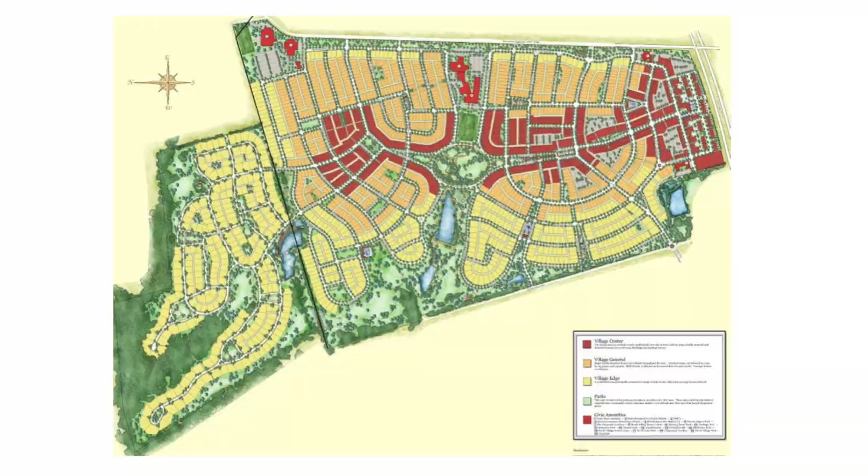And this is really an urbanistic type approach. This community is 600 acres, 2,800 dwelling units, 500,000 square foot in commercial, and 290,000 in total civic area. But the whole point of this whole project is to build a community within a community, to have a work-life balance. And so that's kind of how this all spawned from the original developers and their thinking and their philosophy.

So these homes are traditional style residential craftsman construction. It's kind of the first of its kind in this area of Louisville. You'll see houses that range anywhere from about 2,200 square foot all the way up to 5,000 square foot. You got a good mix of single-family residential houses in here. Again, it is a mixed-use community.

There is commercial space. This would be a big retail area that's in the middle of the town square. Restaurants, bars, clothing stores, just all different types of things. It has its own church. It has several schools in the area, and that's 600 acre property.

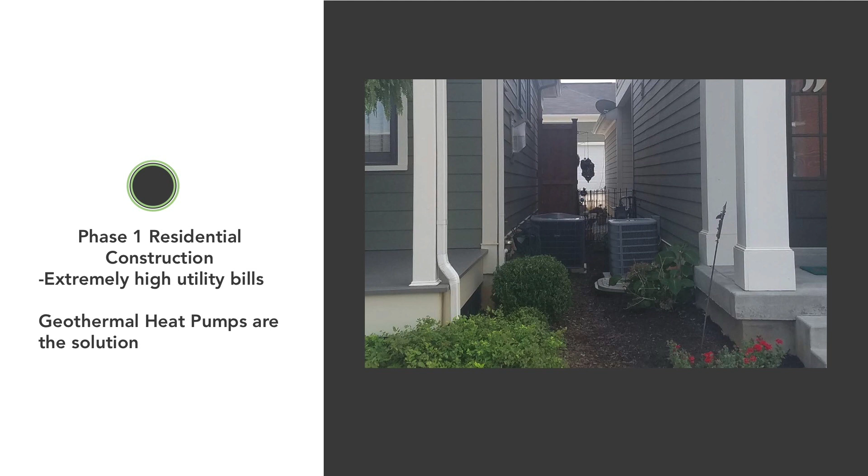So let's get into how this ended up being geothermal, because in the beginning it wasn't going to be a geothermal heat pump community. But what they found after they went into phase one, they started finding that what they were using was not working. And the reason why it wasn't working is because the setbacks on the houses were so tight. We're talking between 3 and 12 foot setbacks. And so as you can see in this photograph here, we have outdoor condenser units that are literally sitting right on top of each other.

So what was going on is that these units were failing prematurely. And the reason why is because they were literally cross-contaminating with hot air. They were trying to pull all this heat out of the houses, and the units were working against each other because they were literally stacked right on top of each other. So a couple things. They were failing prematurely, and when they didn't fail, they were very inefficient. They just weren't able to have any efficiency to them. They had no capacity, so therefore the houses were very uncomfortable. It just never worked right.

So when you had the inefficiency and then ultimately the premature failure, you had very unhappy homeowners. You know, they moved in with some expectation of a realistic electric bill. Well, they were getting astronomical electric bills, especially in Louisville, Kentucky, where if you've ever been there, it gets hot. So that was phase one construction. Close proximity, unit failure, noise.

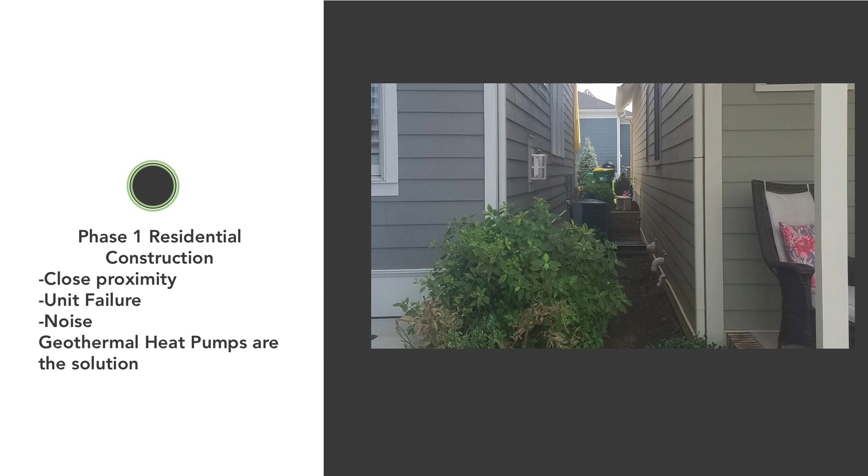Again, when you have these tight setbacks, you have small front porches, back porches. That was the other problem. All of these condenser units that were running outside, literally, it made a bunch of noise. So when these people are in this urbanistic type community, everything's real tight. When they're sitting outside, they were listening to these outdoor condensers. And so therefore that created another problem.

So what we did is I was giving a presentation at the National Association of Home Builders annual board meeting and trade show, a presentation on heat pump technology. And that's where I met one of the managing partners of Norton Commons, and he came to me and he said, man, I really need to look at this technology. He said, we have energy efficiency problems, all the problems that I just described. How can you help us with a solution with this technology?

And so next thing you know, I'm flying down there, we're going through it. A lot of people will always come to me and say, how did you get this all put together? It's like wedding planning. You literally have to plan this out. You have to vet the installing contractors. You have to educate the home builders that are actually in these projects. Typically, developers have a list of home builders that they'll bring in that they want to build in these type developments. So you have to go through and train, educate.

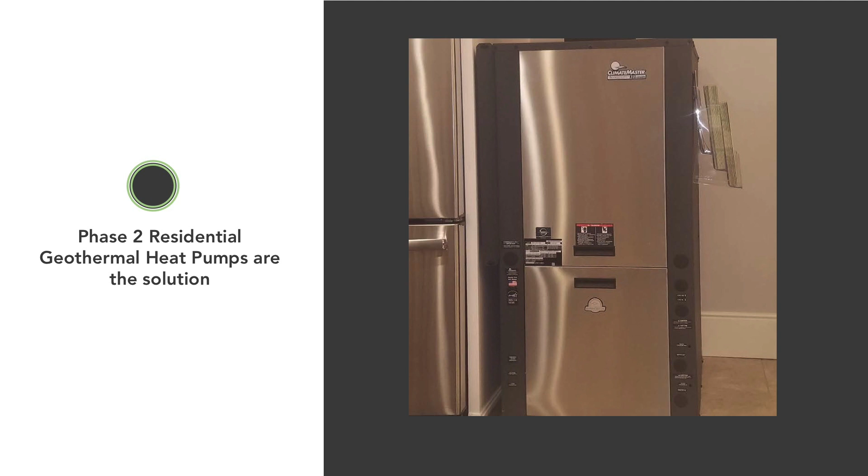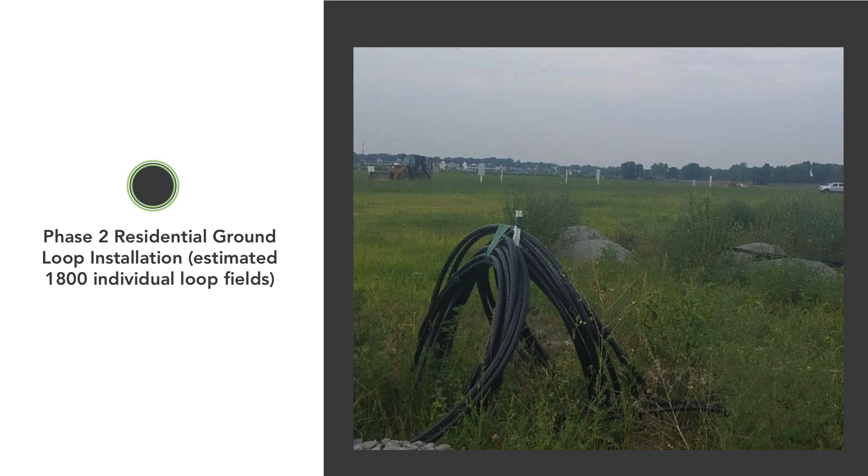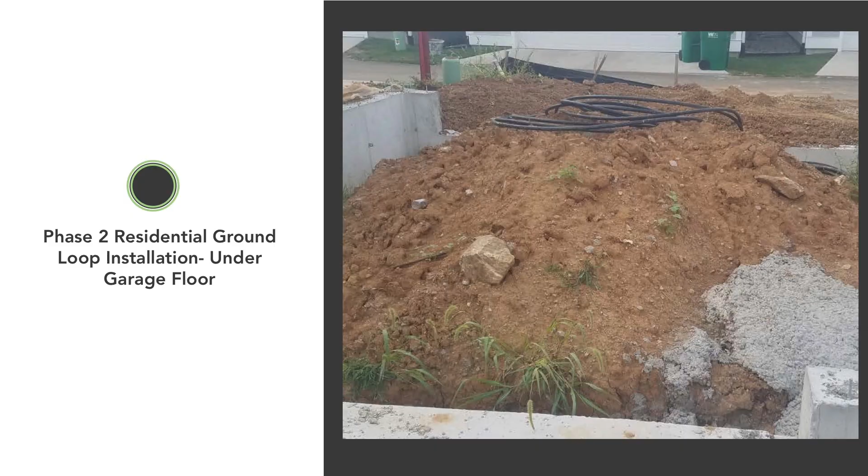So phase 2, we came in and we started drilling out for the different structures that were going up. They were pre-planned structures. We knew the load calculations on them, so we knew what the loop fields were going to need to be as far as the design. We did 300 foot per ton, the vertical closed loop system on this project. We would drill them, header everything together, and run the pipes up through the garage floor, or some of these homes had basements, so we would do a penetration through the basement. And then this would be the mechanical space.

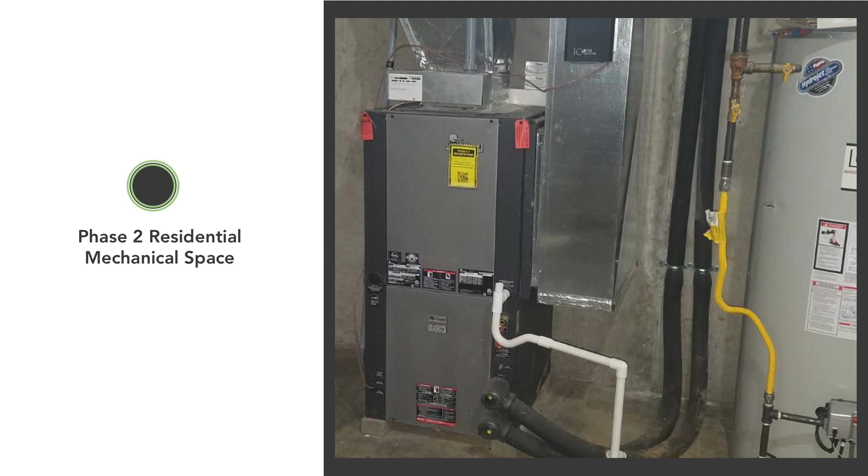And again, these homes are all electric. They did plumb gas into these homes, but it's not being used. It was a mandate by the gas company that they had to bring in their lines for them to get power, because the utility there has both the electric and the gas. So it's kind of a different animal from what we're dealing with down here in some markets. But it was a mandate.

So again, phase 2: no noise, 40 to 60% increase on HVAC heating and cooling efficiencies, hot water per home. Unit service life increased. These units last about 24 years. There's case histories on it. Geothermal heat pumps last a long time. There's no outside condensers, so therefore you don't have that noise.

The other thing with outside condensers is you can also have theft. People steal these things. And they ran into that early on in their construction phases, where these houses were being framed in rough-in stage, and people would come out and literally steal the condensers. So no outside condensers, happy HOA. And then there was a load leveling effect on the utility as far as electrical usage. So that's all I have on this project.

If you guys have any questions, again, I planned this whole project for the developer. I put it all together, and if you have things that are coming up in your markets like this, I can definitely help you. So if you have questions, come and see me.